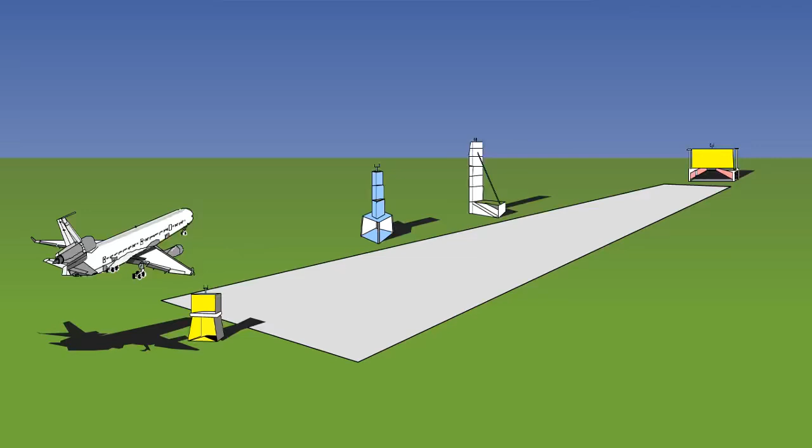The Microwave Landing System, MLS, was designed to replace the ILS with an advanced precision approach system that would overcome the disadvantages of the ILS and provide greater flexibility for its users. In 2009, London Heathrow was the only civil airport using the system. Advances in another landing system, the Local Area Augmentation GPS system, may, however, influence the decision of other airports, especially in the USA, as to whether or not to introduce MLS.

The universally installed ILS has several disadvantages. These are: there are only 40 channels available worldwide. The azimuth and glide slope beams are fixed and narrow. As a result, aircraft have to be sequenced and adequately separated, which causes long delays. There are no special procedures available for slower aircraft and short takeoff and landing aircraft.

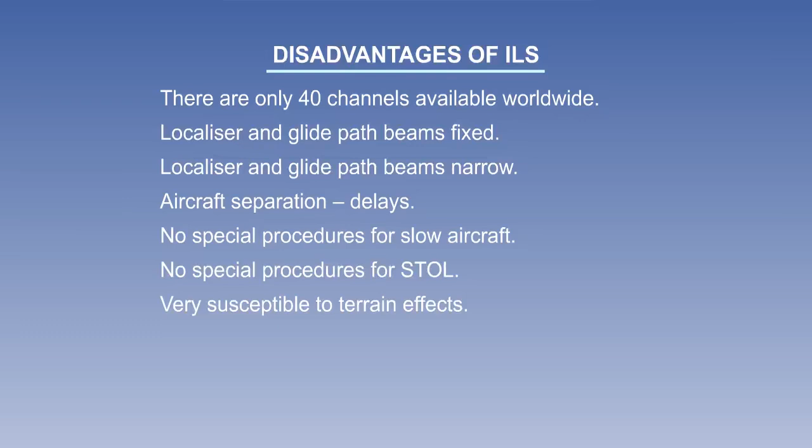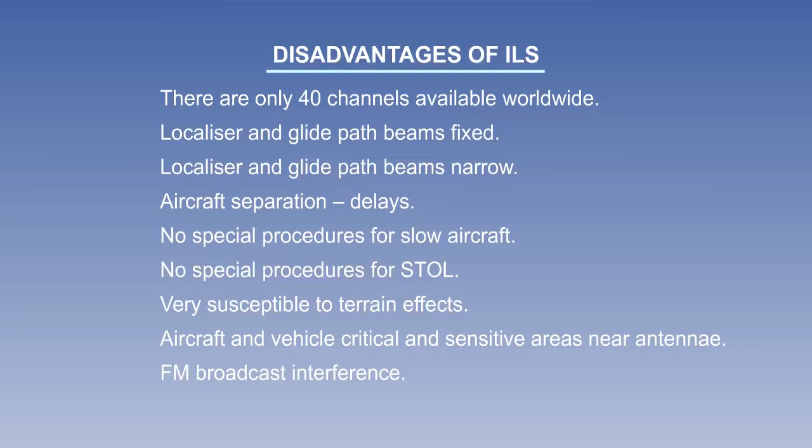ILS cannot be sited in hilly areas, and it requires large expanses of flat, cleared land to minimize interference with the localizer and glide slope beams. Vehicles, taxiing aircraft, low-flying aircraft and buildings have to be kept well away from the transmission sites to minimize beam bending. It suffers from FM broadcast interference.

The MLS has the following advantages over the ILS. It is not subject to siting problems, and because of its small size, can be sited on the taxiway side of the runway. It operates in the SHF band, and so is not affected by ILS or FM transmissions. 200 channels are available, 5 times the number available for ILS. It is available to light aircraft, helicopters, and short takeoff and landing aircraft.

Further advantages are that aircraft can choose various approach routes. Landing delays in poor weather are reduced. Installation costs are much lower. It has a built-in DME. Equipment failure is indicated by flags. Flare and back azimuth functions are possible, but not currently implemented.

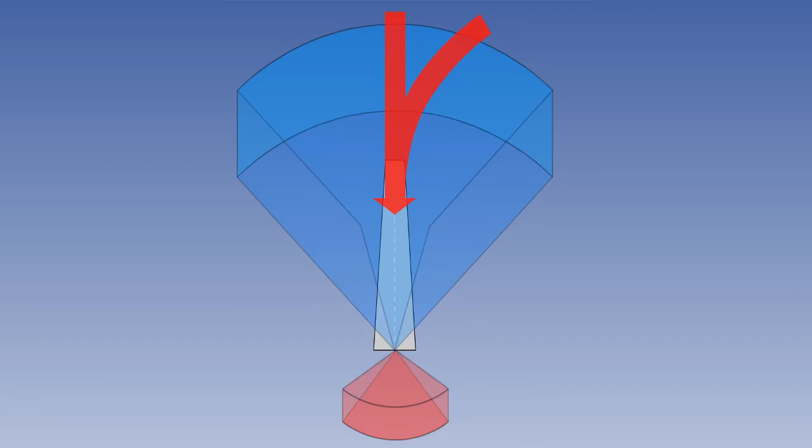The azimuth coverage is much greater than conventional ILS. It is 40 degrees either side of the runway QDM, and it extends out to between 20 to 30 nautical miles, and up to a height of 20,000 feet. The elevation transmission provides a wide range of glide slope angles, from 0.9 degrees up to 20 degrees. And as the elevation signal extends through the whole of the azimuth coverage, it provides precision glide slope guidance at all points where azimuth guidance is available.

Aircraft are therefore able to make an offset approach. That is, they can join the approach procedure as close as 2 nautical miles from the airfield. This allows greater traffic flow, quicker approaches, and may improve noise abatement. A secondary system is provided to give go-around and departure guidance up to 20 degrees either side of the runway direction, up to 15 degrees in elevation, to a height of 10,000 feet and with a range of 10 nautical miles.

An additional advantage of MLS is the ability of the system to transmit auxiliary data such as station identification, which always starts with M for MLS, system condition, runway conditions, wind shear and weather.

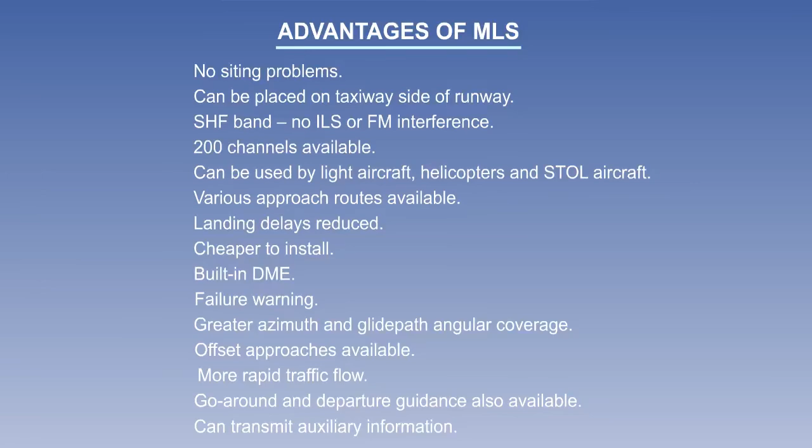The ground components define a coordinate system in space, and the aircraft's position in this reference frame is fixed by airborne equipment. The 3 space coordinates are azimuth angle, elevation angle, and distance from a reference point on the airport, and they are generated by separate subsystems. The forward azimuth subsystem is located beyond the runway stop end, on the extended centerline and radiating in the approach direction.

It defines azimuth position. The elevation subsystem, located to one side of the runway and also radiating in the approach direction, defines the elevation angle. A DME beacon is co-located with the azimuth element, and it supplies slant range distance from that point. The range of these systems is approximately 30 nautical miles.

A missed approach azimuth subsystem, located ahead of the runway threshold and radiating towards the stop end, provides guidance for missed approach maneuvers. A flare subsystem near the elevation element is designed into MLS, but ICAO have stated that it is not intended to be implemented.

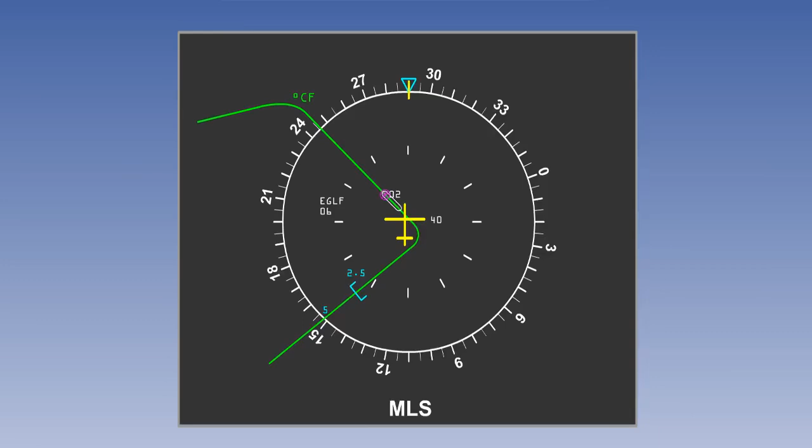The airborne equipment is designed to continuously display the position of the aircraft in relation to the pre-selected course and glide path, along with distance information during approach as well as during departure. Aircraft fitted with MLS equipment, such as Airbus, will display the information on their electronic navigation screen.

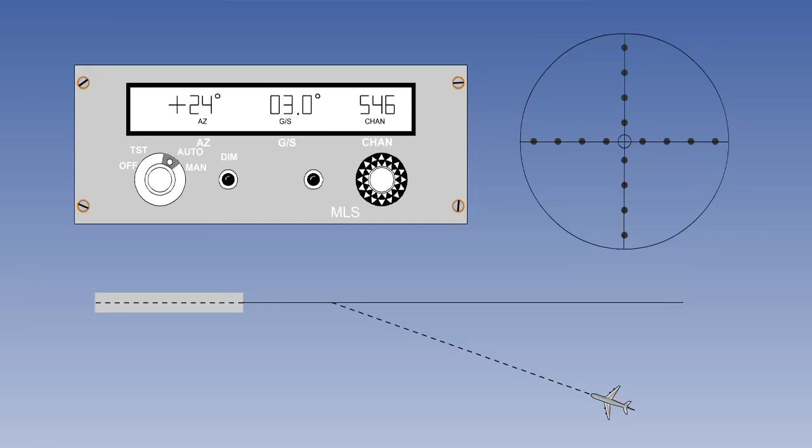The display is similar in principle to the ILS, in that it shows if the aircraft is too high or low. However, it is different from the ILS in that the indications of right or left are given relative to the selected course. So here, for instance, we initially get a command to follow the offset course until we are in line with it. The indication we see here is turn left, because the runway is left of the aircraft's course. The receiver control unit looks like this.

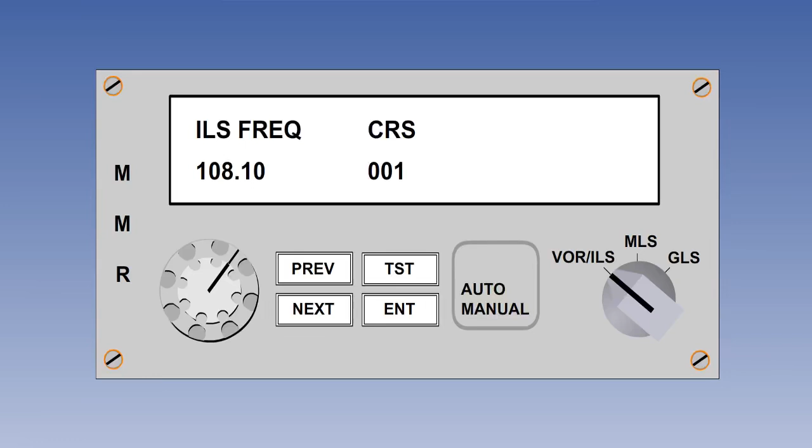Alternatively, in order to receive ILS, MLS and GPS transmissions, aircraft are equipped with multi-mode receivers and a combined control unit for ease of use by the flight crew. The system is very accurate, giving a minimum 95% lateral accuracy of no more than 20 feet either side of the centerline at the approach reference datum, which is 50 feet above the threshold at the centerline.

ICAO recommend an accuracy of 13.5 feet. Degradation can be no more than twice this figure at 20 nautical miles, the coverage limit. The vertical accuracy at the same datum is plus or minus 2 feet, and at 20 miles degradation must be no more than 0.2 of a degree on a 3-degree glide slope.

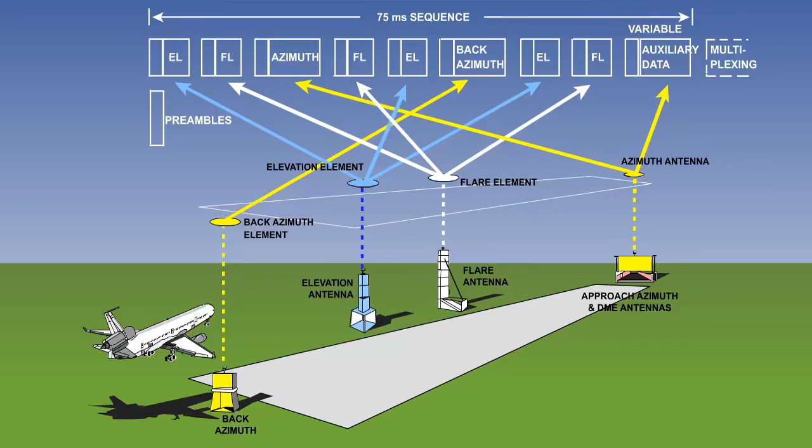MLS employs the principle of time division multiplexing, whereby only one frequency is used on a channel, but the transmissions from the various angle and data ground equipments are synchronized to assure interference-free operations on the common radio frequency. Azimuth and glide slope location are both achieved in the same way, by the use of time-referenced scanning beams.

The azimuth beam starts its to-sweep at one extremity of its total scan and travels at a uniform speed to the other extremity at a scan rate of 13.5 scans per second. It then starts its fro scan back to its start position. The time interval between the reception of the to and fro pulses is proportional to the angular position of the aircraft in relation to the runway on course line.

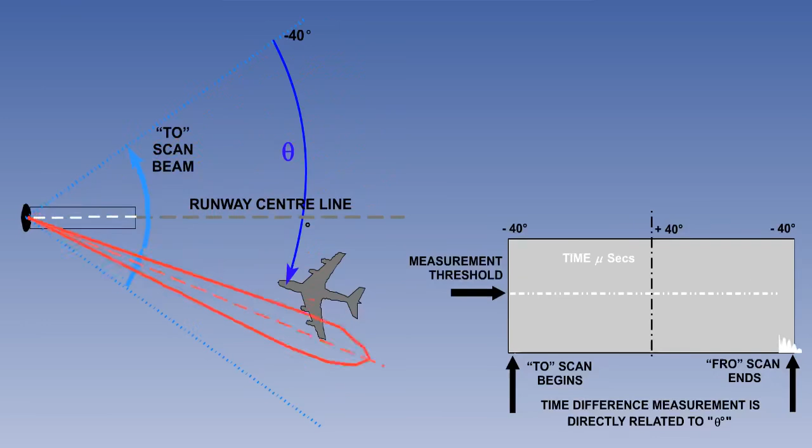So, the maximum time interval between the passage of the to and fro beams would be measured when the aircraft is at the extreme left of the coverage, and minimum time when the aircraft is at the extreme right-hand edge of coverage. The same principle is used for the elevation calculation, but the scan rate is 40.5 scans per second.

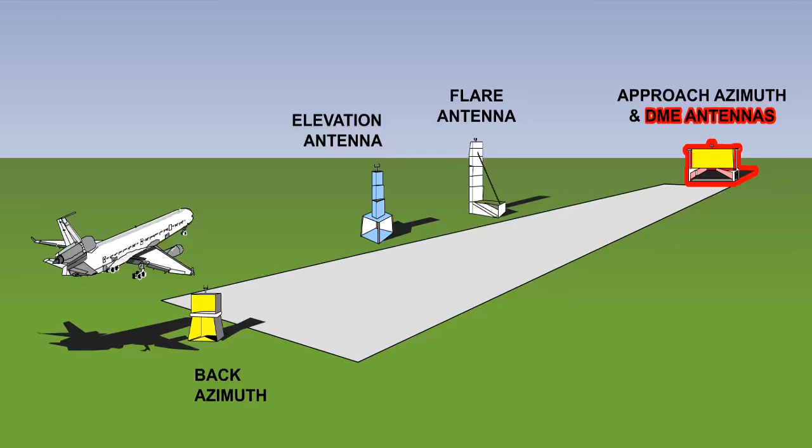The distance of the aircraft from the threshold is provided by DME. For Cat 2 and Cat 3 approaches, a precision DME, DMEP, accurate to within 100 feet must be available. The number of channels available for MLS is 200, spaced 300 kHz apart, from 5031.0 MHz to 5090.7 MHz in the super high frequency band. The wavelength is about 6 centimeters.

Since the basic technique is that of time multiplexing, all functions can take place on a single channel. Essentially, each function in the time-space transmission is a separate entity and is preceded by an identification preamble. The receiver can therefore recognize each element of the sequential transmission. The emission designators for MLS are N0X, the unmodulated carrier, and G1D, the data transmission component.

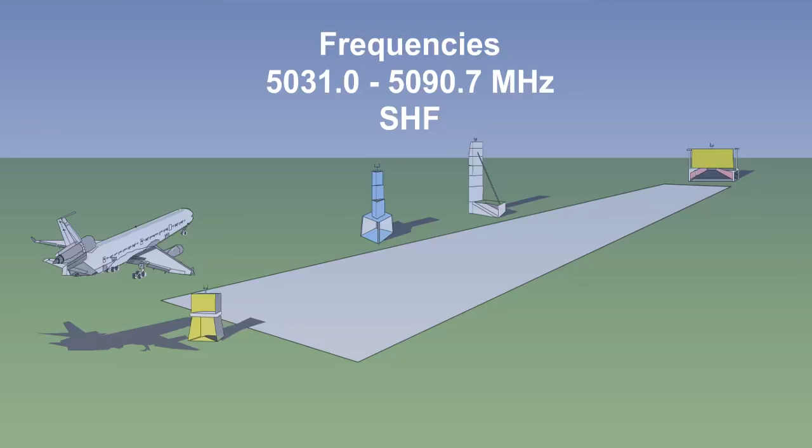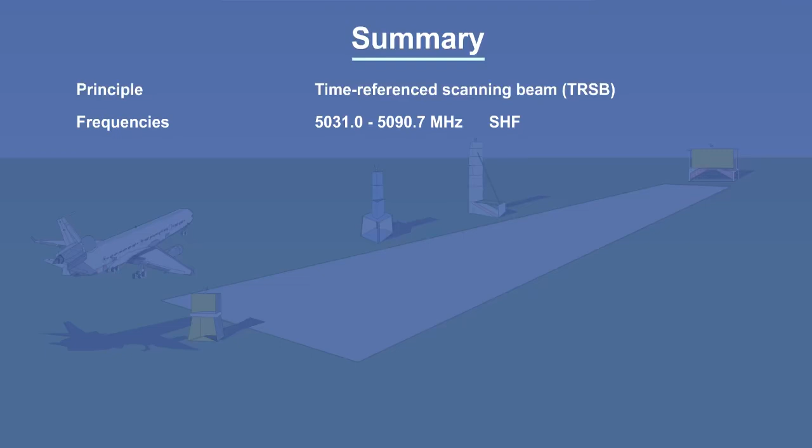These are the main points to remember. The basic principle is a time-referenced scanning beam. The frequencies used are 5031.0 MHz to 5090.7 MHz in the super high frequency band. The four elements are the approach azimuth with DME, the elevation, the back azimuth, and the flare.

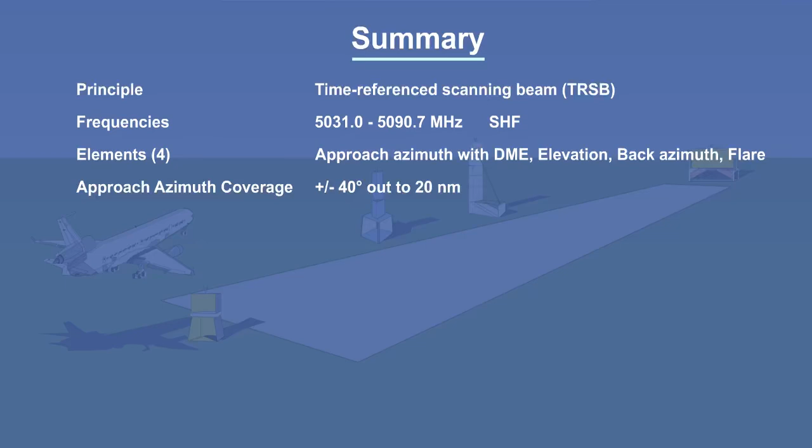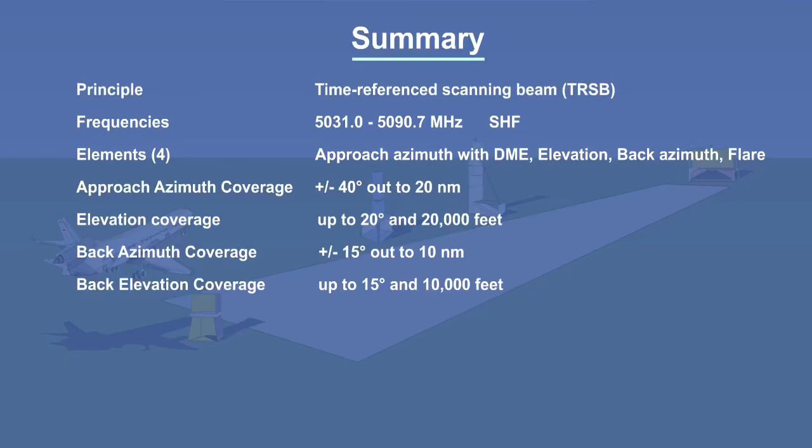The approach azimuth coverage is plus or minus 40 degrees, out to 20 nautical miles. The elevation coverage is up to 20 degrees, up to 20,000 feet. The back azimuth coverage is plus or minus 15 degrees in azimuth, out to 10 nautical miles, and up to 15 degrees elevation, up to 10,000 feet.

The primary advantages are a flexible approach direction, a flexible glide path angle, no siting problems, and no FM interference. This concludes the lesson on MLS.